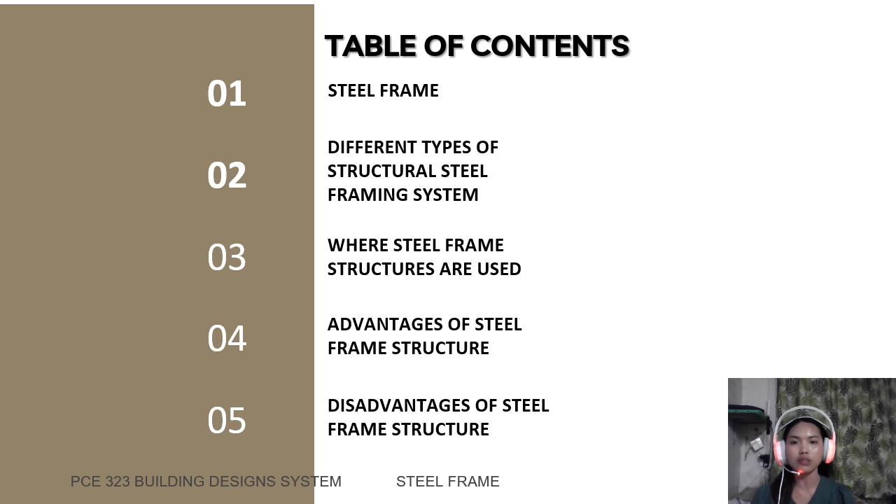But first, let's talk about steel frame. So what is steel frame? Steel frame is a building technique that has a skeleton frame of vertical steel columns and horizontal I-beams, which is tinatayo siya sa mga rectangular grid to support floors, roof, and walls of the building that is attached to a frame.

The important features of steel framing are its flexibility, plasticity, or ductility. It can bend without cracking, as a steel building can flex when it is pushed to one side by, say, wind or an earthquake. This property allows steel buildings to bend out of shape or deform, thus giving warning to inhabitants to escape. So sabi din dito that failure in steel frames is not sudden, as steel structure rarely collapses.

So by the development of steel frame, nagiging posible yung tinatawag na skyscraper. So we all know that a skyscraper is a tall, continuously habitable building having multiple floors. So, 'di ba, sa ibang bansa, it is very common to see skyscrapers, lalong-lalo na sa mga first world countries. Dito naman sa Philippines, I think rarely lang nakikita yung mga skyscrapers.

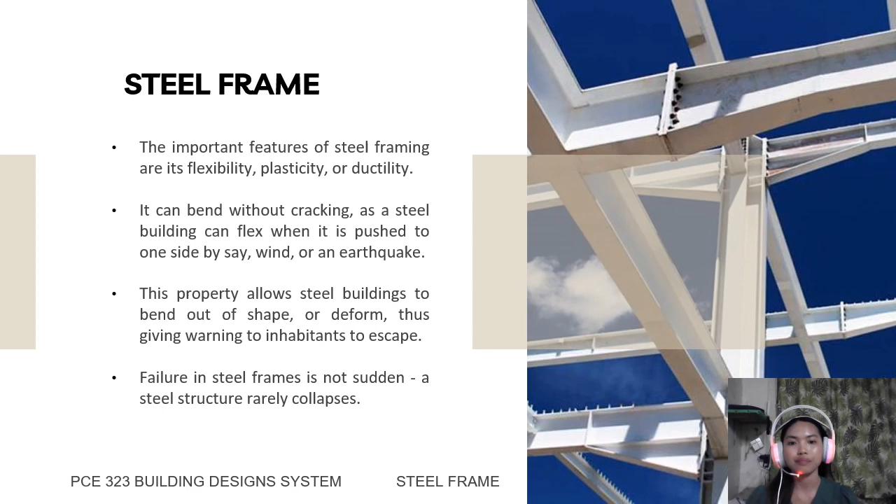However, one important property of steel is that it quickly loses its strength in a fire. So, nagre-reduce or agad-agad nawawala yung strength ng steel kapag na-expose siya sa fire. At 500 degrees Celsius or 930 degrees Fahrenheit, mild steel can lose almost half its strength. So, ito yung nangyari sa World Trade Towers in 2001.

So I did my research and I found out that on September 11, 2001, a Boeing 767 jet flew into the North Tower of the World Trade Center or WTC in Lower Manhattan. So after that, 17 minutes later, another plane crashed into the South Tower. So within 2 hours, both towers had collapsed.

So gaya ng sabi ko kanina na isa sa importanteng property ng steel is nagre-reduce or nawawalan siya ng strength when it is exposed to fire. Therefore, steel in buildings must be protected from fire or high temperature. This is usually done by wrapping it with boards or spray-on material called fire protection.

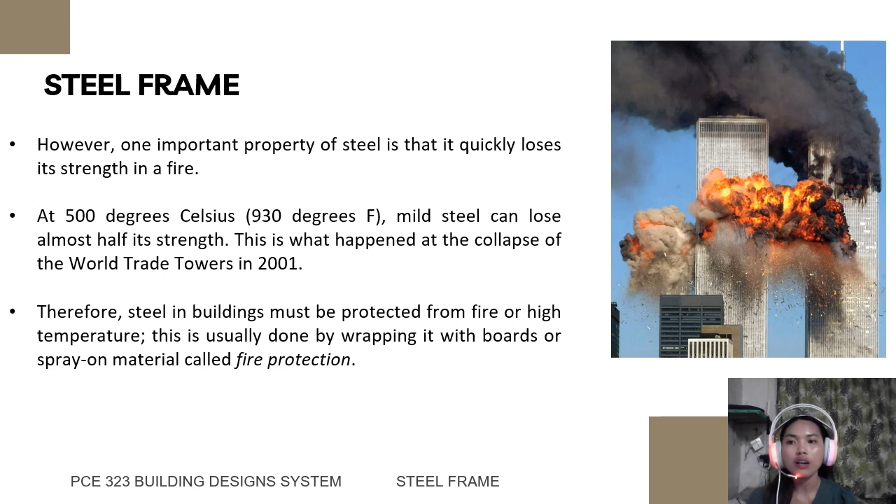So, where are steel frame structures used? So, saan nga ba ginagamit itong steel frame structures? So, we have four here. First one is the high-rise buildings. It's because of its strength, low weight, and speed of construction.

And the second one is industrial and warehouse buildings because of its ability to create large span spaces at low cost. And the third one is the residential buildings in a technique called light gauge steel construction. And of course, the temporary structures, as these are quick to set up and remove.

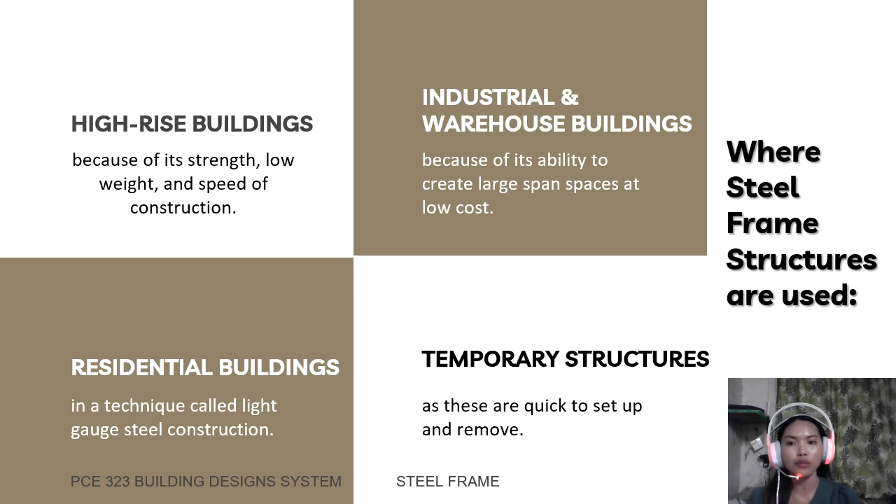So, as I have mentioned a while ago, these are the different buildings that I have said and explained. So the first one is the high-rise buildings. Minsan tinatawag siyang tower block, apartment tower, residential tower, or office tower. Usually, ito yung mga matataas na gusali, which is kabaliktaran ng mga low-rise buildings.

And the second one is the industrial buildings. It includes buildings used directly in the production of power, the manufacture of products, yung mga mining of raw materials, storage of textiles. So those are the examples.

Ang warehouse buildings naman, it is a building for storing goods. So it is usually used by manufacturers, importers, exporters, and they are usually large plain buildings in industrial parks on the outskirts of cities, towns, or villages.

And of course, the residential building. A residential building is a building containing separate residences where a person may live or regularly stay. So, ang mga examples nito is condominiums or apartments.

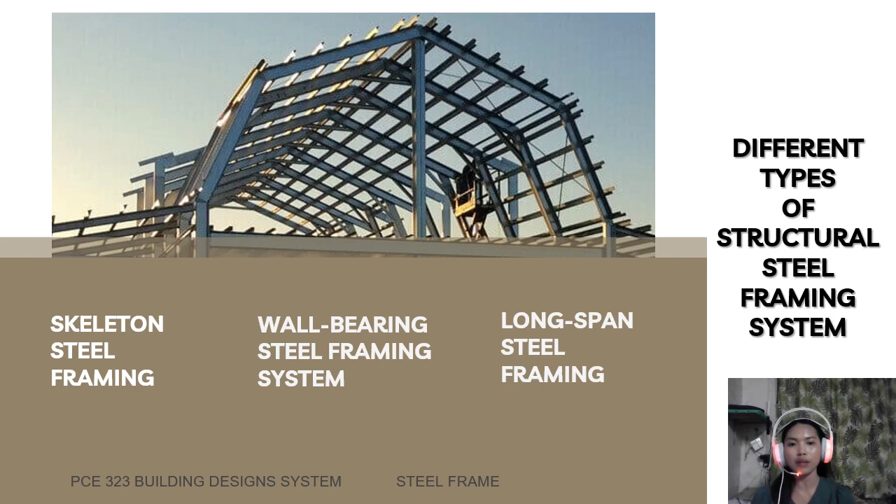Let's discuss first the skeleton steel framing system. A skeleton frame refers to a structure commonly used for multi-story building construction. It incorporates a system or network of connecting beams and columns which support the building's exterior and interior walls and floors, and transmits the loads to the foundations.

Around the perimeter of the structure, builders install spandrel beams to support the masonry walls. The spandrel beam is the exterior beam that stretches horizontally from one column to another column. It is also called an edge beam.

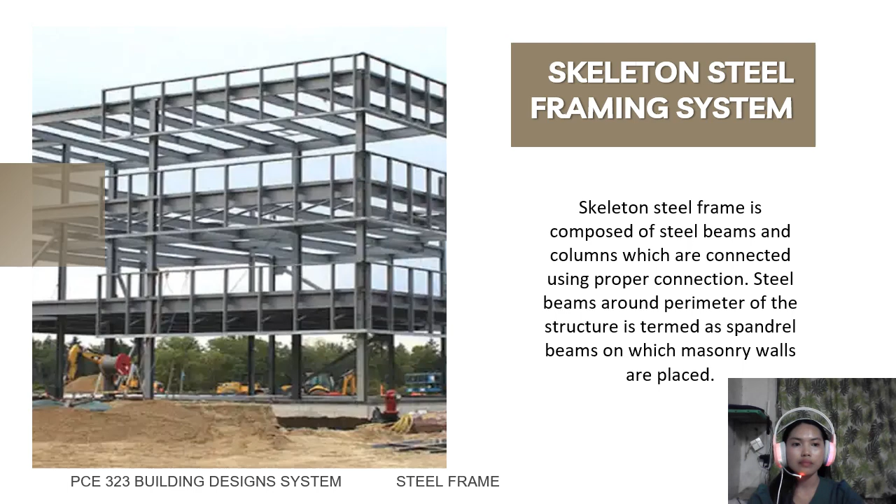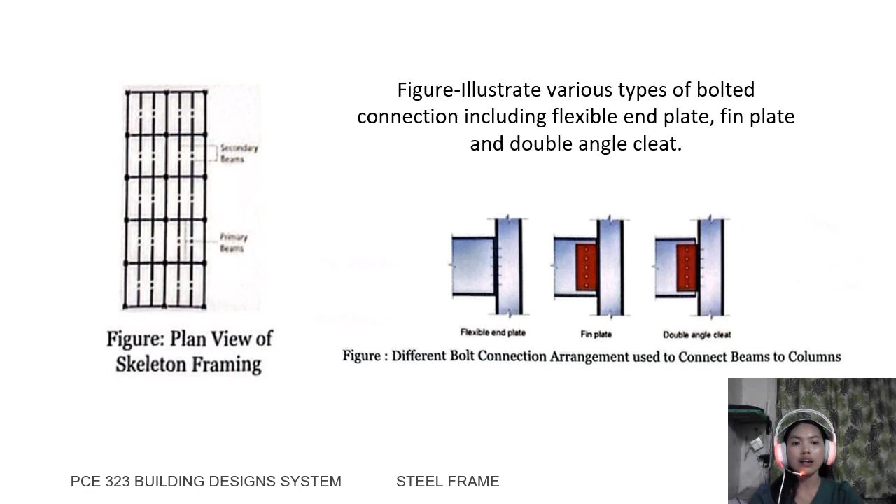So usually, this skeleton framing is used in multi-story buildings, the tall ones.

Next one is the wall-bearing steel framing system. In a wall-bearing steel framing structure, building wall, whether interior or exterior, is used to carry the end of structural members that support floor or roof loads. So it's end to end.

Wall bearing should be adequately strong to not only be able to carry vertical reactions, but also to resist any imposed horizontal loads. So there should be excess capacity to resist the horizontal loads, because it can already carry the vertical reactions, but for horizontal loads there should be extra.

The wall bearing frame method is a construction technique where masonry walls are built inside and around the perimeter of a building. Steel members such as beams are then attached to these walls using anchor bolts and steel plates for support.

So that's what needs to be done or placed - these walls are fitted with anchor bolts and steel plates for support. The design and construction of this framing system depend on factors like the distance between supports or the span distance, and the amount of weight the structure needs to bear or load intensity.

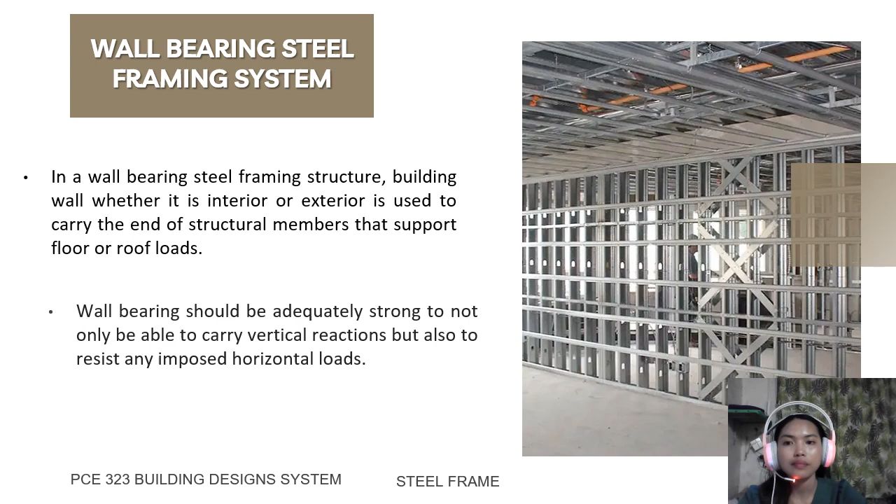A further application of the wall bearing system is the utilization of steel beams known as lintels over wall openings like doors and windows. So the first picture shows using steel beam to support masonry lintels - it has parts like exterior angle and interior angle. The second one is the end of steel beam, which supports floor loads.

It is installed on walls. Intermediary support is applied to support the beam because the span is large. You can see that the span here is very big. So this is one of the actual applications of wall bearing framing structure.

And the last one is using steel beam to support masonry lintels - this is the one shown earlier.

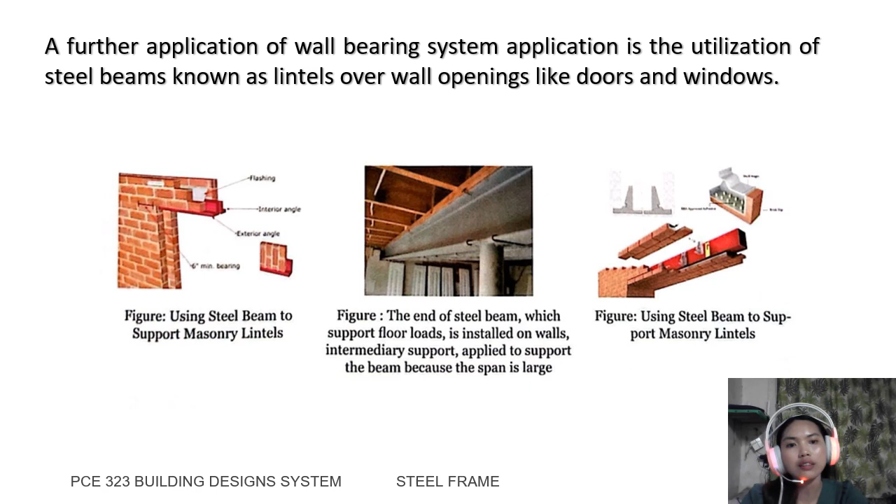Okay, and then the last one is the long span steel framing. Long span steel framing is considered when large clearance is required and such long spanning cannot be realized using steel beams and columns.

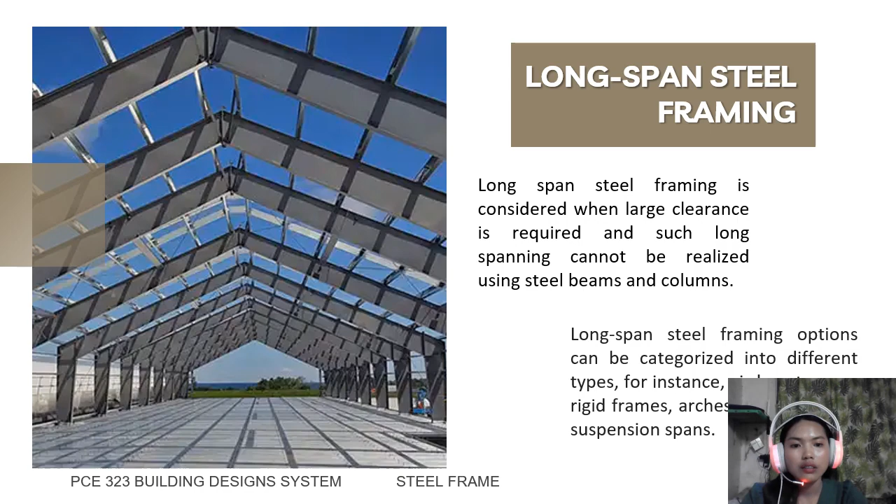Here is the table for long span steel framing types, their applications, and various configurations.

I will discuss first the trusses. Trusses are structural elements known for their ability to span longer distances due to their greater depth, which provides rigidity against bending. So when we say rigidity or rigid, it means it is unable to bend or not flexible.

Different types of trusses are utilized in long span construction, including Pratt trusses, fink trusses, Warren trusses, bowstring trusses, Vierendeel trusses, and scissors trusses. Each type offers specific advantages and is selected based on factors such as span length, load requirements, and architectural considerations. These trusses I mentioned differ from each other, and that depends on their application.

And we also have the girders. Girders are deep steel beams designed to span long distances in construction projects. Hybrid and strap girders are examples that span lengthwise across structures and connect to the main girders to provide additional support and reinforcement. These girders play a crucial role in ensuring the structural integrity and stability of buildings and other infrastructures.

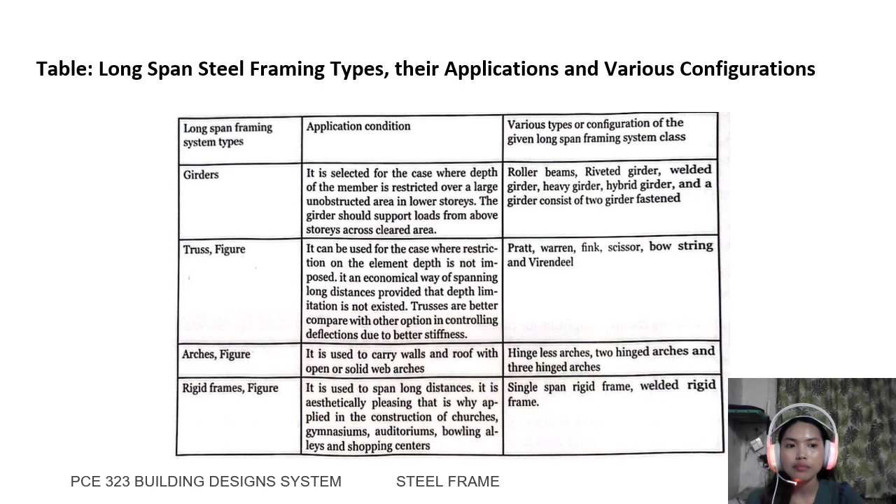So I have here different figures, showing trusses, arches, and rigid frames. Up here are the different types of trusses used in steel structure construction. This is the Warren truss. This is the Pratt truss. This one is the Fink truss. And the last one is the bowstring truss. These are very common, and we see some of these around us.

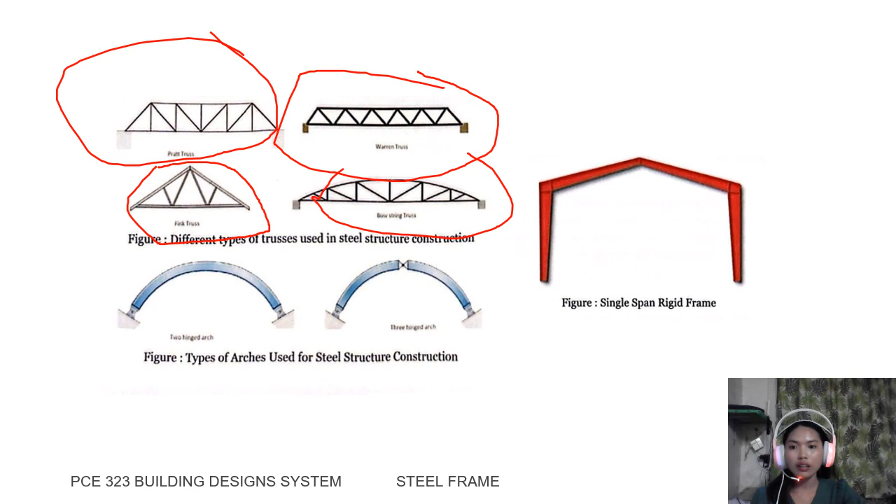Okay, and then we also have types of arches used for steel structure construction. We have here the two-hinge arch, and this one is the three-hinge arch. This one is the single span rigid frame.

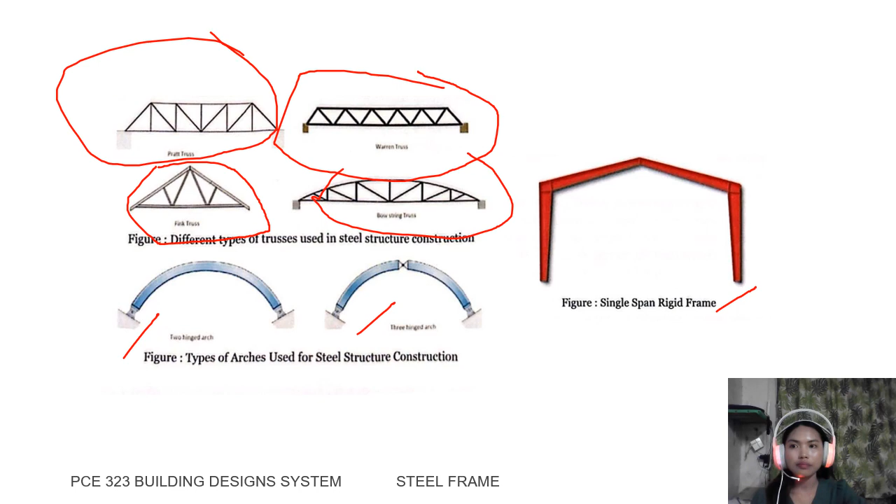So now let's talk about the advantages of steel frame structure. We have six here. The first one is steel is lighter than wood. If you weigh a 2x4 of wood and a 2x4 of steel, the steel will weigh more as a result of its density. So it's just about density.

Steel is lighter than wood, which not only reduces labor during construction, but also lowers material shipping costs. Additionally, the lighter weight of steel can simplify the design of a building's foundation and other structural support systems, leading to further cost savings for the project.

And also, you can build faster with steel. Building with steel offers numerous advantages, especially in today's high-tech era where clients prioritize projects that are completed under budget and ahead of schedule. Who doesn't want the work finished quickly, for the infrastructure being built? We all want that, right?

Fast-track projects can be challenging for architects and construction crews due to the risk of taking shortcuts. Some clients are afraid that working too fast means shortcuts are taken and the structures aren't built properly, which may compromise safety and result in subpar finished products. However, steel construction changes this narrative by providing a solution that ensures efficiency without sacrificing quality or safety standards.

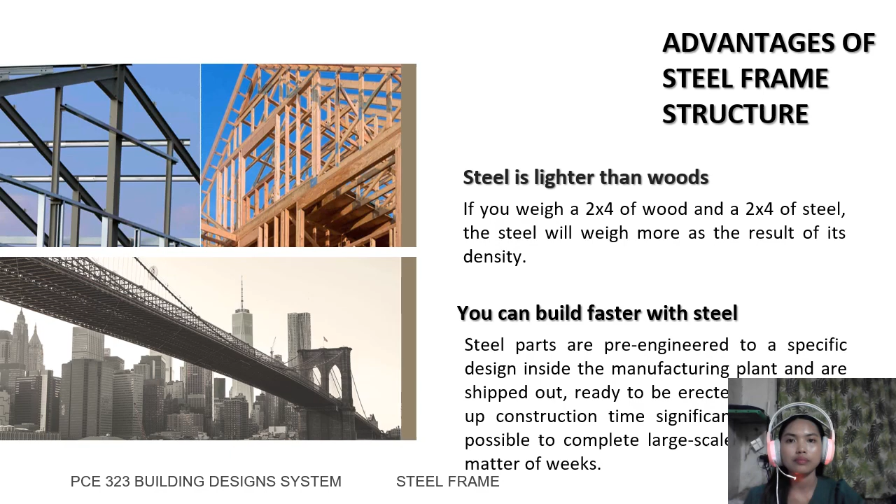And of course, we have save money with steel. The more you save here, the cheaper it gets. So, number one, steel can be recycled. Number two, steel is so durable and requires so little maintenance, making it a more economic choice for building owners. Especially for high-rise buildings, this is usually what they use, steel.

Number three, innovation in steel production combined with greater competition to meet rising steel demands has brought steel prices lower than they've been in 20 years. So due to high demand, steel has become cheaper.

And we also have, due to a steel structure's almost unrivaled ability to withstand high winds, heavy snow loads, fire, and seismic activities, insurance companies often offer lower premiums on policies underwritten for metal buildings. So insurance companies charge or offer less.

And we also have faster construction times, which means fewer interest payments to the lender. It's better when the interest is lower, right? So you save more money while keeping your infrastructure safe.

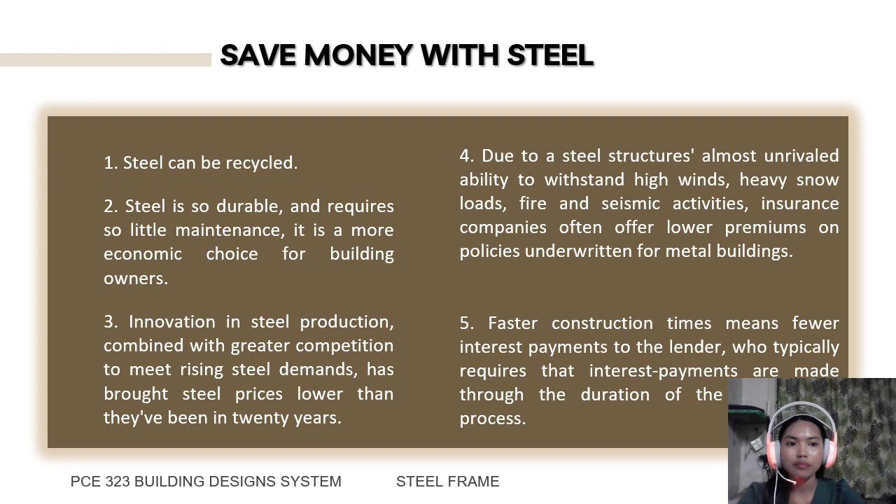Steel's versatility extends beyond commercial construction into the residential sector as well. Furthermore, steel and metal siding and roofing materials offer durability and longevity that surpass their wood counterparts, providing homeowners with more durable and long-lasting options for their homes.

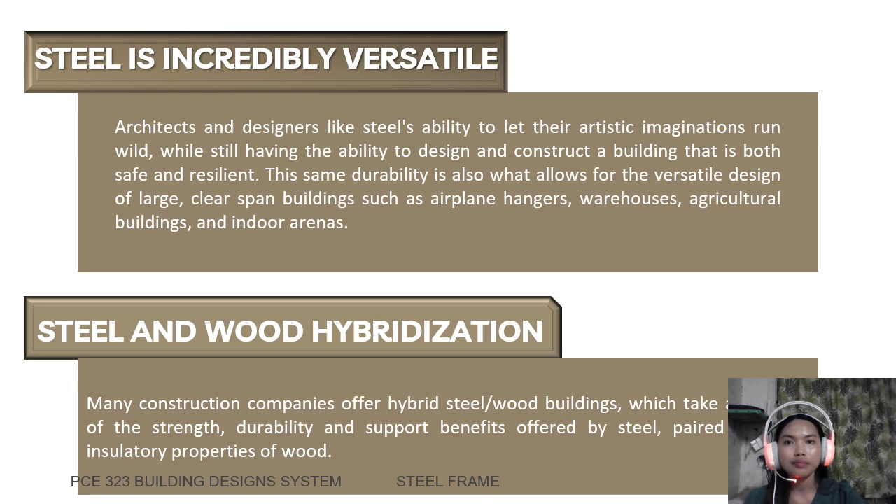And of course, steel is environmentally friendly. Steel is made from recycled materials and can be recycled at the end of its lifespan.

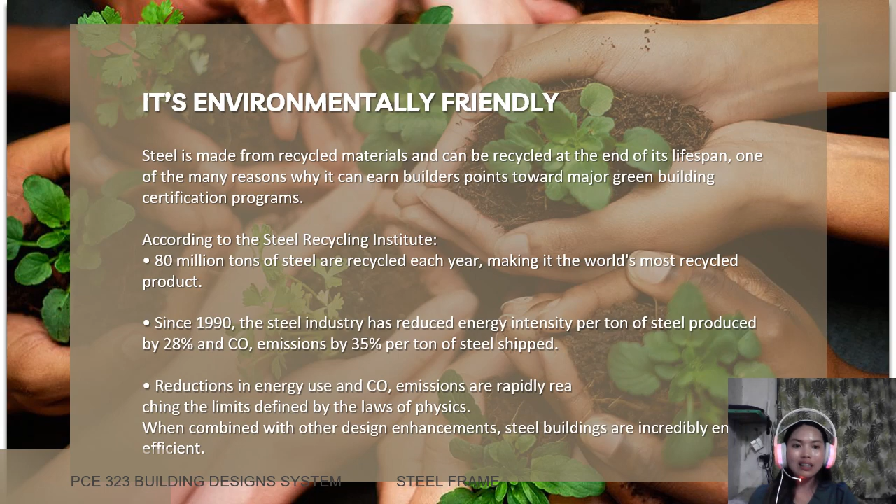And since there are advantages of steel frame structure, there are also disadvantages of steel frame structure. I have five here.

First, the maintenance cost of a steel structure is very high. Due to the action of rust on steel, expensive paints are required to renew it from time to time so that resistance against severe conditions increases. Steel does rust, right?